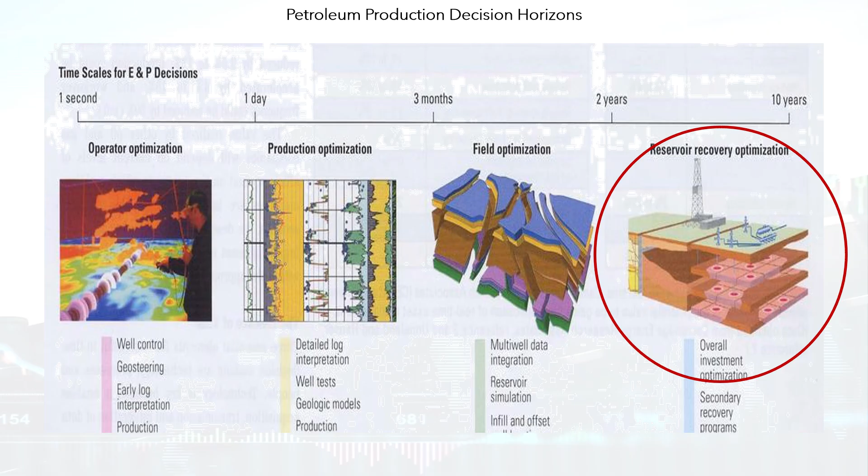The problem to be addressed in this lecture is related to reservoir recovery optimization. It includes overall investment optimization and secondary recovery programs, and concentrates on oil fracking and shale gas recovery.

Since the gas is trapped in shale sediments, its extraction is carried out using the hydraulic fracturing or fracking technique. This technique begins with the drilling of a vertical well that, once the desired depth has been reached, is accompanied by a horizontal drilling that can extend between 1 and 1.5 kilometers. This type of drilling is repeated in different directions, starting from the same initial vertical hole.

Once drilling is done, and due to the low permeability of shale rock, it is necessary to fracture the rock by injecting a mixture of water, sand and chemicals at high pressure, to allow the flow and exit of the gas. The flow decreases very quickly, so to maintain production it is necessary to continuously perform the hydraulic fracturing procedure in the same wellbore.

The most important socio-environmental impact of shale gas exploitation is concentrated in the decrease in the availability of water for humans and ecosystems. Between 9 and 29 million liters are required for the annual fracturing of a single well. The exploitation of 20,000 wells per year would mean an equivalent volume of water between 4.9 and 15.9 million people in a year.

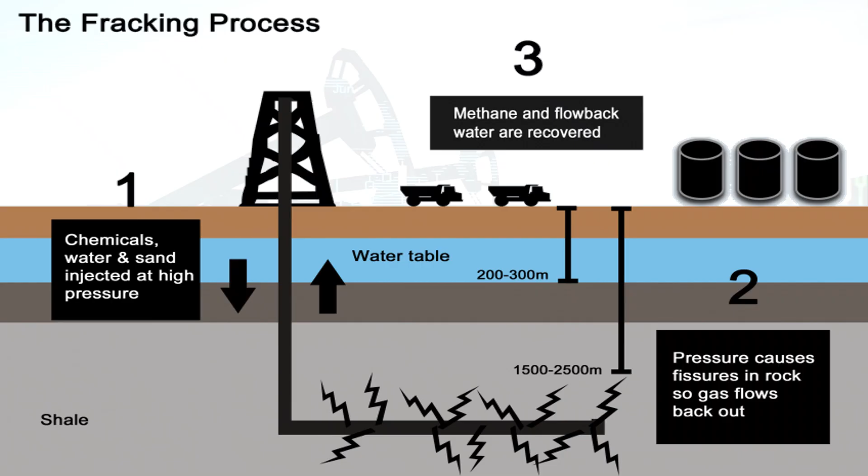What is the difference between conventional and unconventional gas? The terms conventional gas and unconventional are often misunderstood and have taken on different meanings in the gas industry. Conventional gas can be developed with a limited number of wells due to the accumulation of hydrocarbons in a confined area, with well-connected pore spaces within the bedrock, which allow effective drainage from strategically located wells.

The gas flows to the surface under its own pressure, driven by a water table under an expanding pressurized gas layer that covers the gas.

In contrast, with unconventional gas, the source rocks that contain the gas have much lower porosity, i.e., the void spaces between the grains that make up the rock are very small, and much lower permeability, i.e., the interconnection of pore spaces to allow gas to pass through the rock is very low. Therefore, artificial stimulation, such as hydraulic fracturing, must be employed to generate the gas flow.

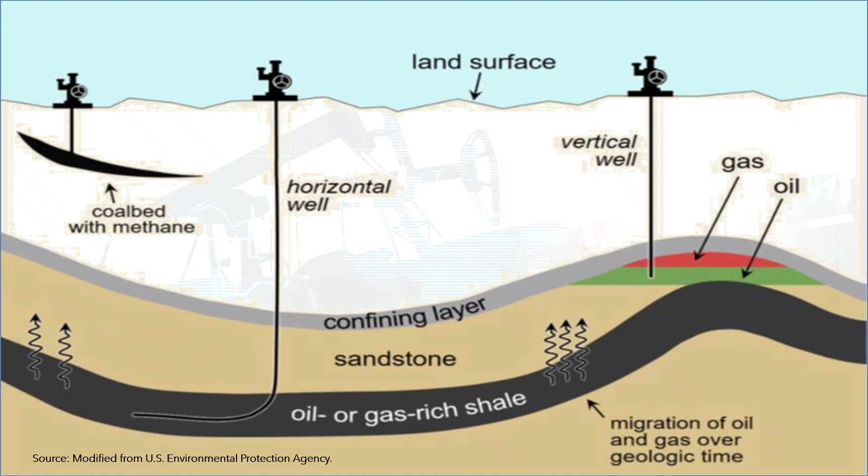Conventional gas production has been improved and many of these techniques have been refined and applied to unconventional gas. Horizontal drilling and hydraulic fracturing have been used for decades in conventional reservoirs, but increased efficiency and accuracy have allowed this technology to be employed in unconventional gas reservoirs, making them economically viable.

The low permeability of the rock means that the gas, whether adsorbed or free, in the pores of the rock, cannot flow easily. To extract shale gas, wells are drilled at depths of between 1,500 and 4,000 meters through several layers of rock to access the shale.

The wells are lined with steel and cement adapted to their purpose, designed to protect the groundwater from contamination. To maximize shale gas recovery, a technique called horizontal drilling is used. This technique usually involves the well changing from vertical to horizontal direction deep underground, away from any aquifer.

Showing how fracking for shale gas oil works.

First, the earth is drilled to reach the area where the shale gas or oil is located. The high-pressure mixture is then directed towards the rock to release the gas or oil, causing it to flow to the surface where it is extracted for energy purposes.

The figure shows a schematic of a typical fracking field. Small fissures are created that release the gas, which then flows up the pipe, digging into the ground and being stored on the surface in containers. The sand ensures that cracks, once opened, do not close, so that oil and gas can flow for a long time after fracturing. Once the fracturing is complete, the constructions are removed and the well is sealed.

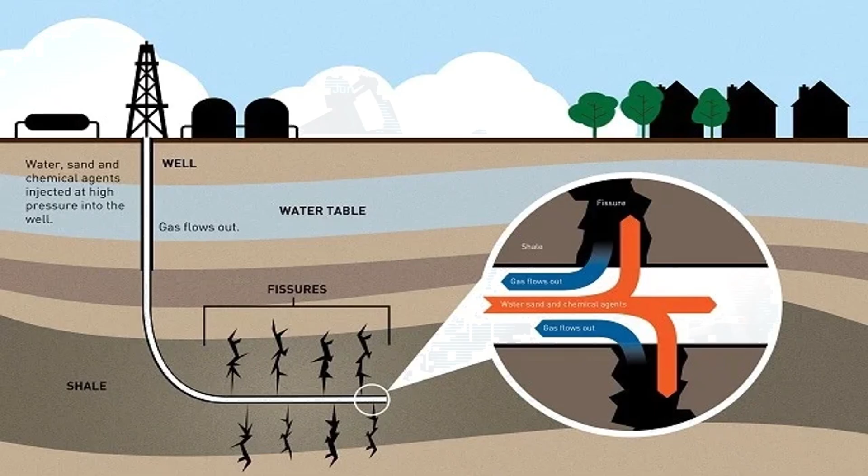Fracking fluids are typically pumped deep into the ground and stored there indefinitely. The shale fracking process is shown in the image: a hole is drilled into shale rock, water, sand and chemicals are pumped into the borehole, pressure in the bore causes fractures in the shale, and gas from the shale flows into the pipe and back to the surface.

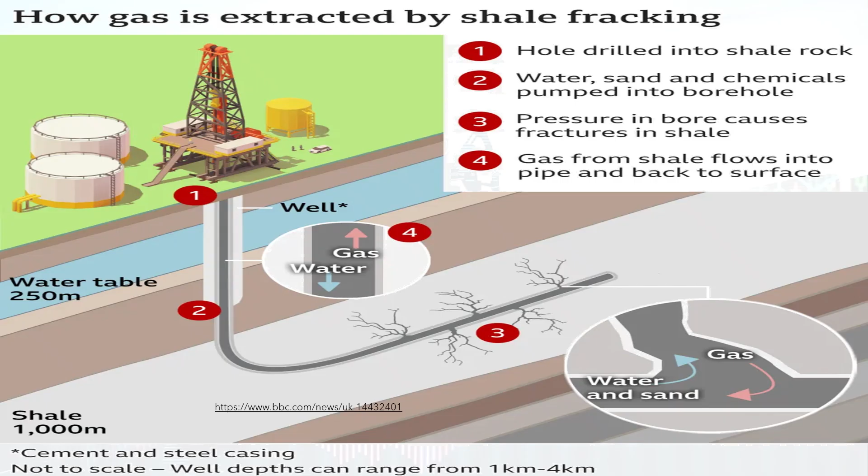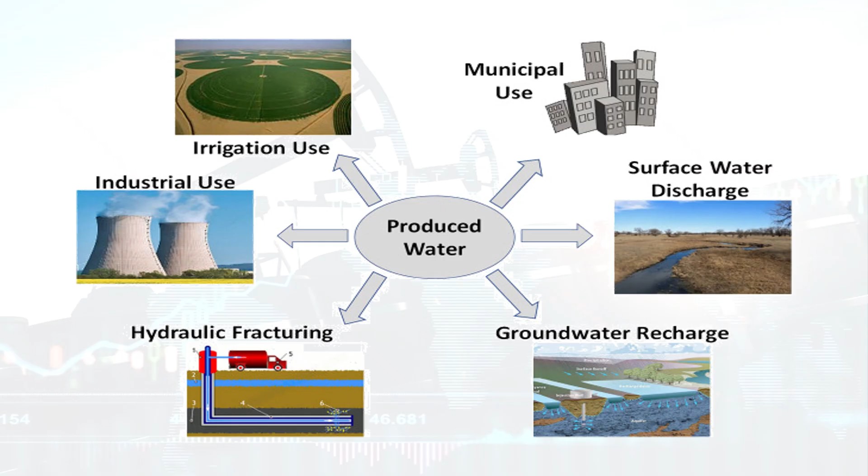Produced water can be used in irrigation, municipal, industry, surface water, groundwater, and hydraulic fracking. Competition between these uses must be considered in any fracking project.

Solution: this type of oil project is subject to the following constraints. Shale gas production: the number of wells previously drilled in a pad determines the shale gas production at every period, while methane, ethane and other NGLs produced at the well pads are directly obtained from the shale gas composition.

Flow balances: stream flows from well pads converge to junction nodes, where they are compressed and diverted to processing plants. Flow balances at junction nodes and separation plants are imposed.

Sizing plants, pipelines and compressors: separation plants construction and expansion, as well as the installation of new pipelines and compressors, are monitored over the planning horizon. This permits tracking of the shale gas processing capacity, the maximum flows in pipelines, and the compression power.

Water supplies: water sources for fracturing new wells are strategically allocated to well pads so as to comply with their limited water availability. Maximum demands: dry gas and NGLs have limited demands from nearby markets.

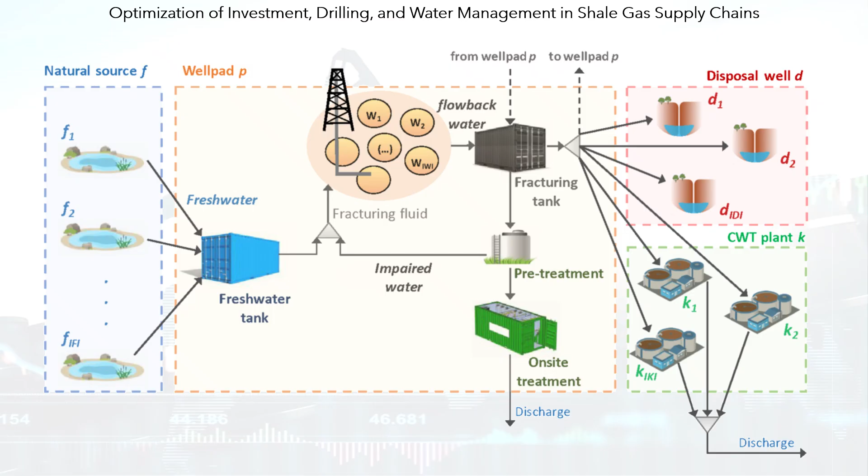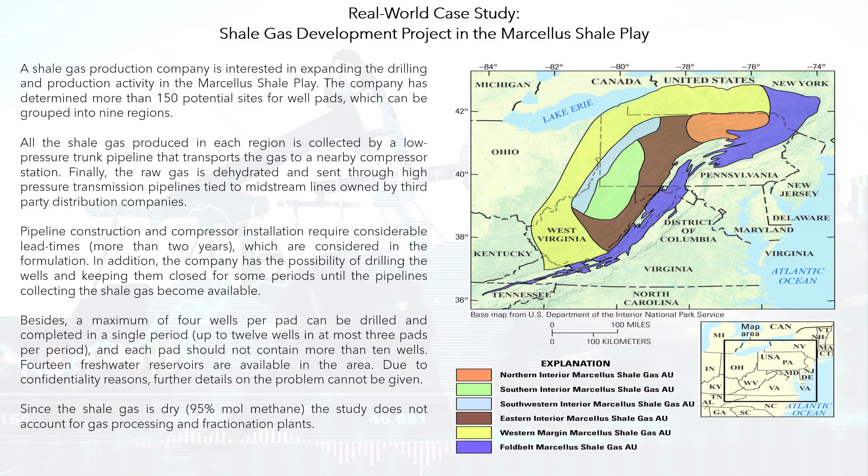Real-world case study: shale gas development project in the Marcellus Shale play. A shale gas production company is interested in expanding the drilling and production activity in the Marcellus Shale play. The company has determined more than 150 potential sites for well pads, which can be grouped into 9 regions.

All the shale gas produced in each region is collected by a low-pressure trunk pipeline that transports the gas to a nearby compressor station. Finally, the raw gas is dehydrated and sent through high-pressure transmission pipelines tied to midstream lines owned by third-party distribution companies.

Pipeline construction and compressor installation require considerable lead times, more than 2 years, which are considered in the formulation. In addition, the company has the possibility of drilling the wells and keeping them closed for some periods until the pipelines collecting the shale gas become available.

A maximum of 4 wells per pad can be drilled and completed in a single period, up to 12 wells in at most 3 pads per period, and each pad should not contain more than 10 wells. 14 freshwater reservoirs are available in the area.

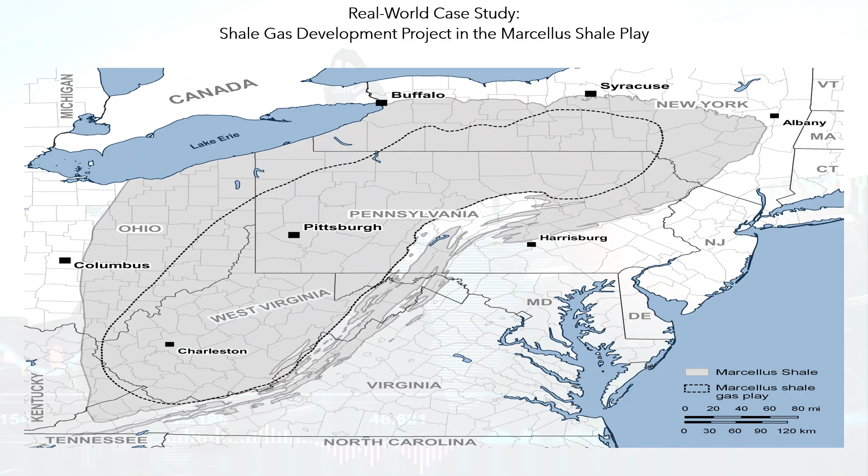Due to confidentiality reasons, further details on the problem cannot be given. Since the shale gas is dry, 95% mole methane, the study does not account for gas processing and fractionation plants.

The Marcellus, Point Pleasant and Utica are extensive formations that cover parts of Kentucky, Maryland, New York, Ohio, Pennsylvania, Virginia, and West Virginia. In 2011, the USGS estimated a mean of 84 trillion cubic feet of natural gas in the Marcellus Shale, and in 2012 the USGS estimated about 38 trillion cubic feet of natural gas in the Utica Shale. This is a significant increase from the previous USGS assessments of both formations.

The Marcellus Shale contains an estimated 1.5 billion barrels of natural gas liquids, while the Point Pleasant Utica Shale contains an estimated 1.8 billion barrels of oil and 985 million barrels of natural gas liquids. Natural gas liquids are liquid hydrocarbons like propane, butane or ethane.

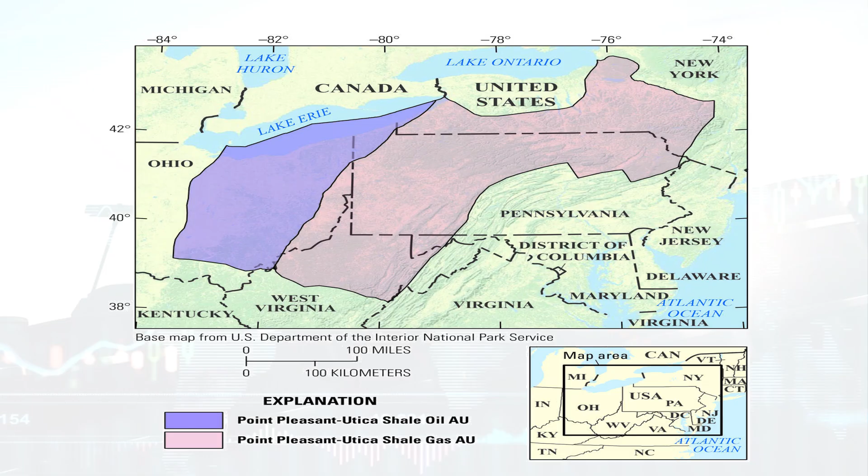Most of the drilling activity at Utica is located east of the Great Lakes, but shale was first discovered in Quebec. Forest Oil officially announced the discovery in April 2008, with 2 vertical wells producing 1 MMscfd at depths of 4,800 feet.

Talisman Energy began operations in Quebec Utica the following year, but overall activity was limited. The province of Quebec all but put an end to new drilling opportunities when it issued a moratorium on hydraulic fracturing in March 2012. Currently, New York and Maryland have similar restrictions.

During exploratory phases in Quebec, Chesapeake Energy claimed a discovery in Utica, Ohio, in September 2011. Its 4 completed wells had an average depth of 5,280 feet, and 3 wells in the liquid-rich part had average yields of 2,051 barrels of oil equivalent per day. The other well in the dry gas window peaked at 6.4 mmcf/d.

Chesapeake Energy management was world-class and acquired approximately 619,000 gross acres, increasing activity through joint ventures while remaining the primary operator. Permits accelerated rapidly, as the Ohio Department of Natural Resources approved more than 1,000 permits between 2010 and 2013. A state report also credited shale with increasing employment in the oil and gas sector by 30%, while offering wages 68% higher than the state median.

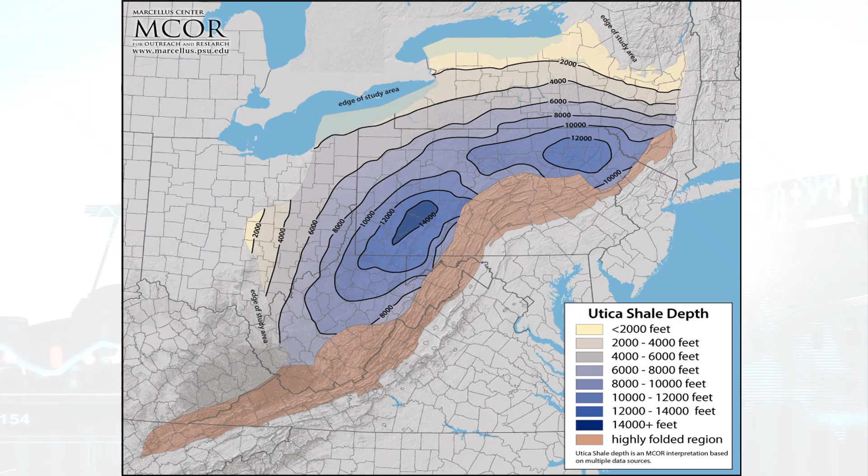Today, drilling productivity shows that Utica's gas production is 67% higher than that of the Bakken, and that its oil production exceeds that of Marcellus. Total gas production has grown at a compound monthly rate of 6% since January 2012.

In March 2015, Seneca Resources announced a test well in Tioga County, PA returned an IP rate of 22.7 mmcf/d. The only catch was that the well was drilled to 12,200 feet and received 30 fracking stages, which may indicate how truly difficult it is to penetrate the rock.

The results still present a measure of success, considering the Utica was initially believed to be predominantly in Ohio. Instead, it reaches all the way to northern Pennsylvania and is presumably economical in New York.

The Utica's viability in Tioga County was confirmed by Royal Dutch Shell late in September 2014, with 2 test wells returning initial production rates of 11.2 and 26.5 mmcf/d, respectively. Shell increased its acreage in the region by more than 50% before announcing the results of the test wells.

The optimal solution yields an NPV in American dollars, with a global optimality gap of 8.2%. The most convenient regions to be exploited during the following 10 years are 2 regions, where a total of 22 and 18 pads are constructed, respectively.

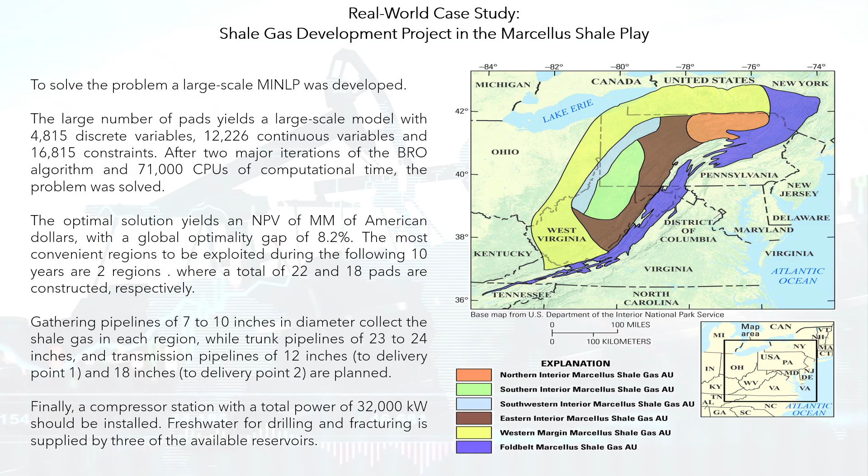Gathering pipelines of 7 to 10 inches in diameter collect the shale gas in each region, while trunk pipelines of 23 to 24 inches, and transmission pipelines of 12 inches to delivery point 1, and 18 inches to delivery point 2, are planned. Finally, a compressor station with a total power of 32,000 kilowatts should be installed. Freshwater for drilling and fracturing is supplied by 3 of the available reservoirs.

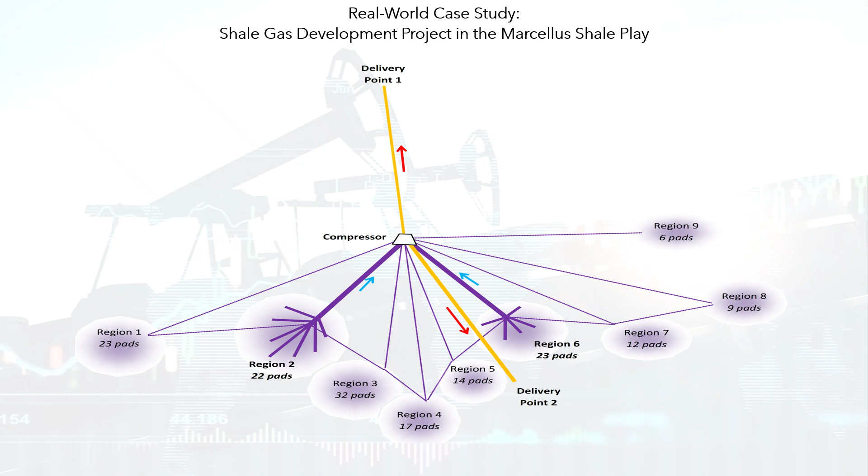Gathering pipelines of 7 to 10 inches in diameter collect the shale gas in each region, while trunk pipelines of 23 to 24 inches, and transmission pipelines of 12 inches to delivery point 1, and 18 inches to delivery point 2. A compressor station with a total power of 32,000 kilowatts should be installed. Freshwater for drilling and fracturing is supplied by 3 of the available reservoirs.

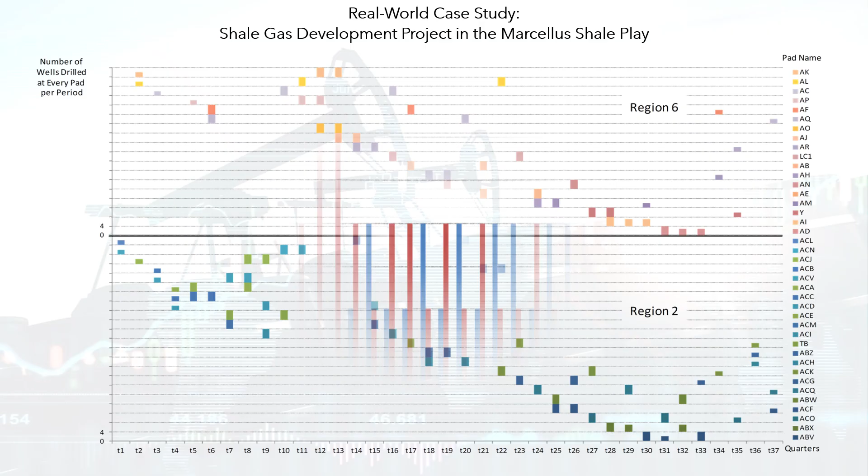The figure shows the number of wells drilled at every pad per period in the Marcellus Shale play. The figure shows the total number of wells drilled at every region. The figure shows the drilling strategy in the Marcellus Shale play.

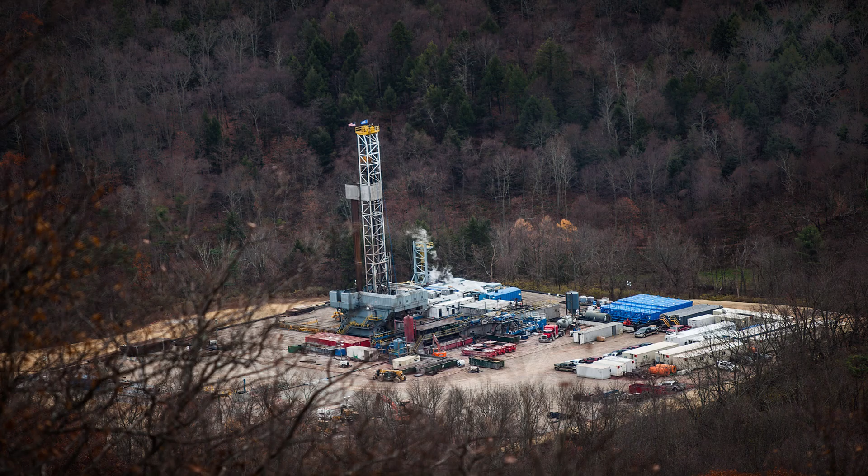Residents fear fracking for gas will cause permanent damage to their forests, state parks and agricultural fields, as well as their water and air. Design of fracking oil and shale gas production networks.

A case study is solved to evaluate the effectiveness of the proposed optimization approach. The figure shows the location of the potential shale gas reserves, according to studies by USGS.

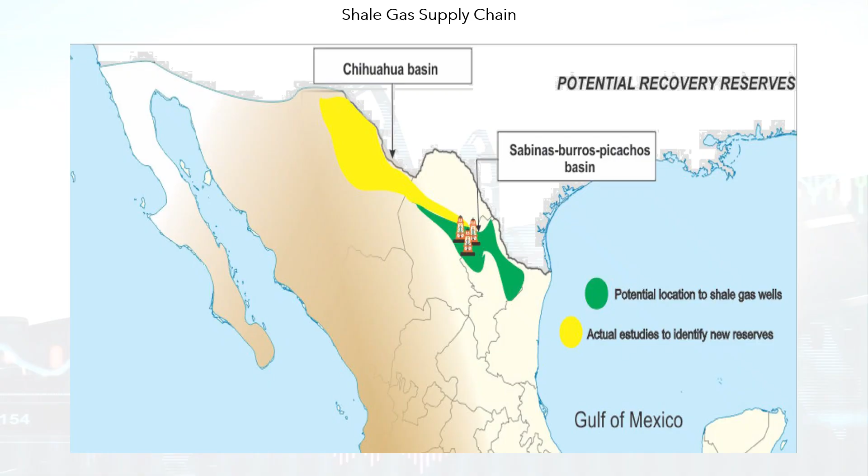The production system configuration shown in the figure requires 2 storage pits, with capacities of 2,100 and 4,950 cubic meters, to prevent the produced water from leaving the well platforms.

The treatment system is composed of 2 forward osmosis units, and a mechanical vapor compression plant, while the second storage system requires 3 units with capacities of 670, 4,950 and 700 cubic meters respectively, and the final disposal is an additional treatment.

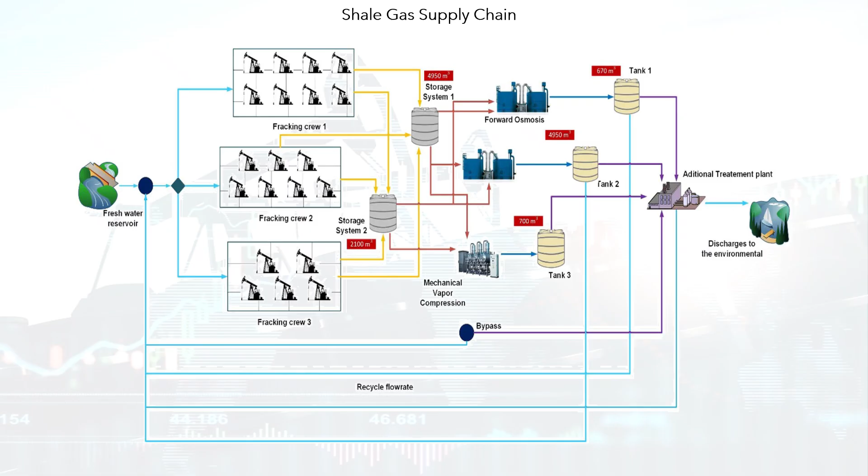IMTAL represents an indirect measure of the pollutants removed by treatment technologies. When this objective is increased, the environmental impact decreases, but TAC increases due to the selection of more effective and more expensive treatment units. On the other hand, when TAC is reduced, IMTAL's value worsens, causing a greater environmental impact.

It should be noted that freshwater consumption is a key criterion, which plays an important role in the selection of the final design associated with each solution belonging to the Pareto curve.

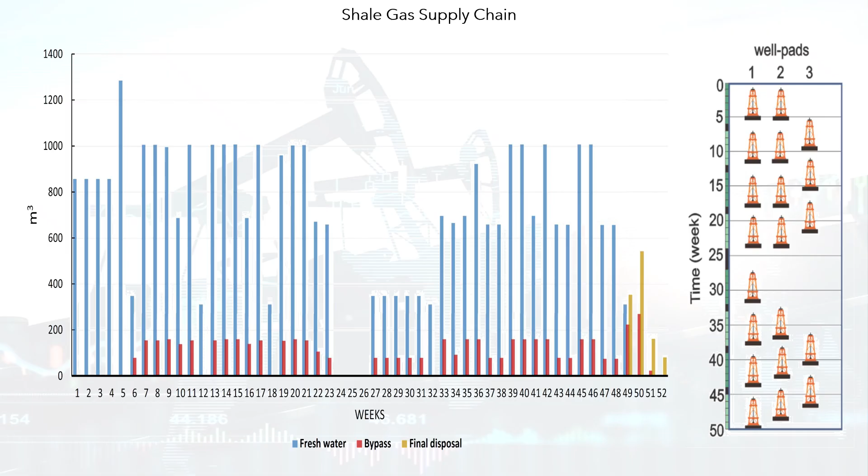The composition of the shale gas supply chain is the result of an optimization process. The figure exhibits the optimal distribution for the water streams to properly operate in point A. It should be noted that freshwater is the main source to carry out the completion.

The following section presents several papers in which Professor Ignacio Grossmann and his team have participated at Carnegie Mellon University.

Optimization models of optimal investment, drilling, and water management in shale gas supply chains. The paper provides an overview of 2014 optimization models for shale gas production. It first describes a mixed integer optimization model for the design of shale gas infrastructures, aimed at optimizing the number of wells to drill, size and location of new gas processing plants, section and length of pipelines for gathering raw gas, delivering dry gas and natural gas liquids, power of gas compressors, and planning of freshwater consumption for well drilling and fracturing.

Optimization models for water management in chemical processes and shale gas production. This thesis was submitted in partial fulfillment of the requirements for the degree of Doctor of Philosophy at Carnegie Mellon University. It is part of the previous paper.

Strategic planning, design and development of the shale gas supply chain network. The long-term planning of the shale gas supply chain is a relevant problem. The paper presents a mixed integer nonlinear programming (MINLP) model to optimally determine the number of wells to drill at every location, the size of gas processing plants, the section and length of pipelines for gathering raw gas and delivering processed gas and byproducts, the power of gas compressors, and the amount of fresh water required from reservoirs for drilling and hydraulic fracturing, to maximize the economics of the project.

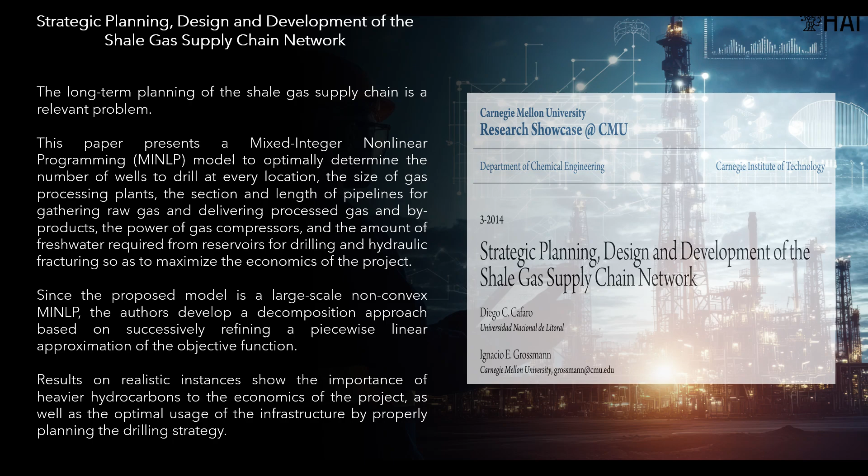Mathematical programming models for shale oil and gas development: a review and perspective. The paper provides a comprehensive review of mathematical programming models for shale oil and gas development, and distinguishes contributions in five major topic areas, namely: development planning, water management, production optimization, supplies, gathering and processing, and life cycle analysis and sustainability.

Environmental and economic water management in shale gas extraction. The paper presents a study of the life cycle impact assessment (LCIA) of water management in shale gas exploitation. The study includes the most common pretreatment technologies and three different desalination technologies of recent interest: single and multiple effect evaporation with mechanical vapor recompression, and membrane distillation. Results show that multiple effect evaporation with mechanical vapor recompression is the most suitable technology. A mixed integer linear programming bi-criterion optimization water management model addresses profit maximization and LCIA minimization.

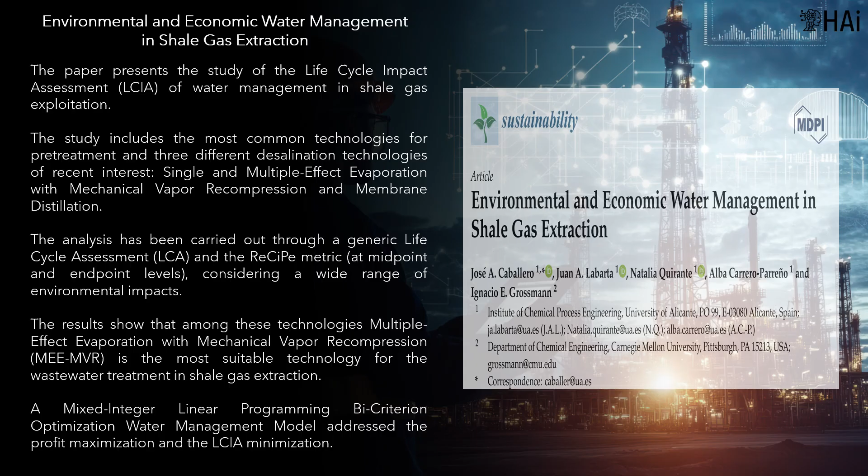Optimization models for shale gas water management. There are four key aspects for water use in hydraulic fracturing, including source water acquisition, wastewater production, reuse and recycle, and subsequent transportation, storage, and disposal. This work optimizes the water use life cycle for well pads through a discrete time two-stage stochastic mixed integer linear programming model under uncertain availability of water.

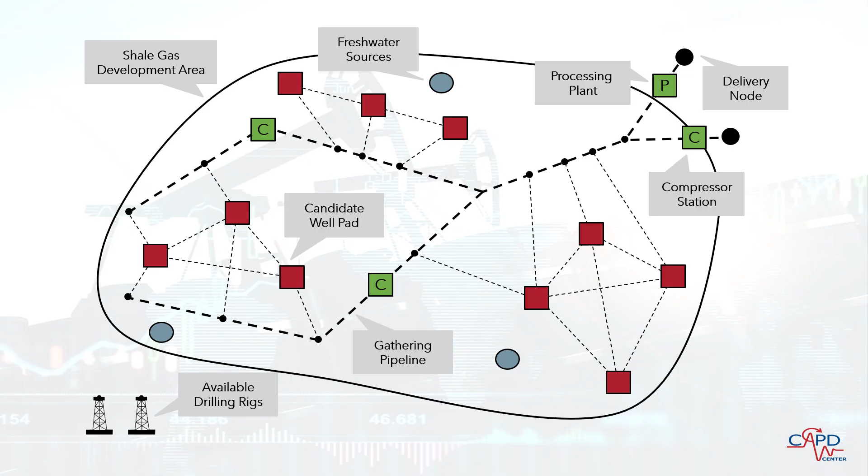The proposed models consider a long time horizon and multiple scenarios from historical data. Two examples of the Marcellus Shale play are presented to illustrate the effectiveness of the formulation and to identify optimization opportunities that can improve both the environmental impact and economical use of water. The main objective is to design the topology of the shale gas recovery network, establish the operating conditions of the network for the duration of its operation, and guarantee the quality of the environment.

Considering that the shale gas development problem is an integer mixed nonlinear programming (MINLP) problem, the proposed algorithm is based on 3 phases. Composition bound pre-analysis identifies bounds for molar fractions based on given gas compositions to obtain good limits. The single delivery node problem solves for a single delivery node MILP problem, to ensure feasibility and a good starting point for the next phase. The multiple delivery node problem solves the nonlinear problem with an existing MINLP solver, such as the outer-approximation method, until the optimal solution is reached.

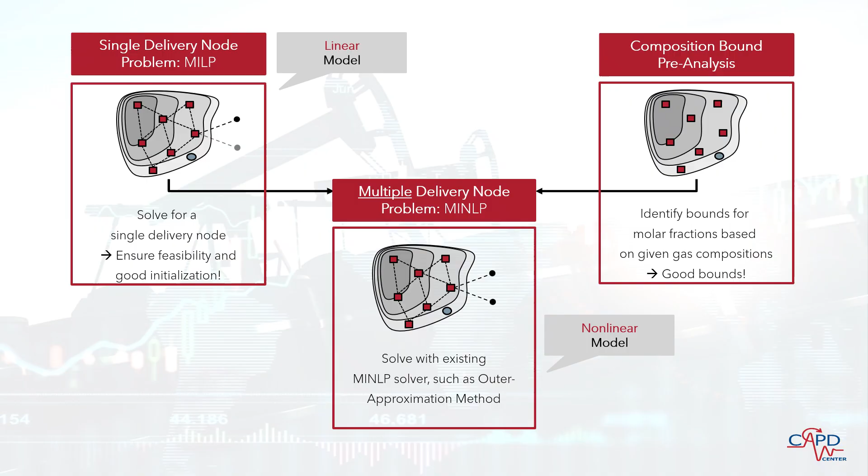The shale gas development problem involves many discrete planning and design decisions that need to be addressed simultaneously, such as the optimal drilling strategy for the multiple delivery node problem. The optimal development schedule is characterized by many return-to-pad operations that maximize overall equipment utilization. The optimization reveals that the optimal strategy could significantly improve the profitability of the gathering system.

The image presents an example of the work carried out by the Center for Advanced Process Decision Making (CAPD) at Carnegie Mellon University, for Carrizo Company, which operates in the Marcellus Shale play. The case is made up of 14 well pads, 540 time periods, 2 impoundments, and 1 frac crew.

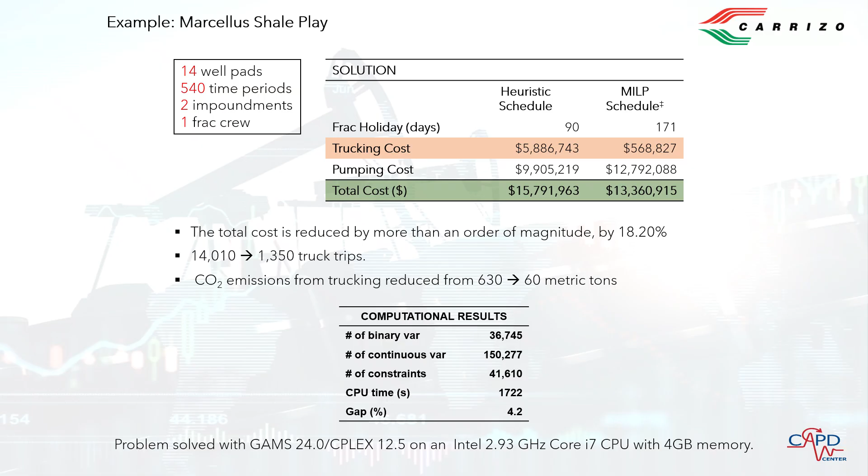Benefits of mathematical modeling compared to a heuristic solution without exact mathematical models: the total cost is reduced by more than an order of magnitude, by 18.20%. The number of truck trips is reduced from 14,010 to 1,350 trips, and CO2 emissions from trucking reduced from 630 to 60 metric tons. In 2015, the problem was solved with GAMS 24.0 and CPLEX 12.5, on an Intel 2.93 GHz Core i7 CPU with 4 GB memory, in 1722 seconds of CPU time.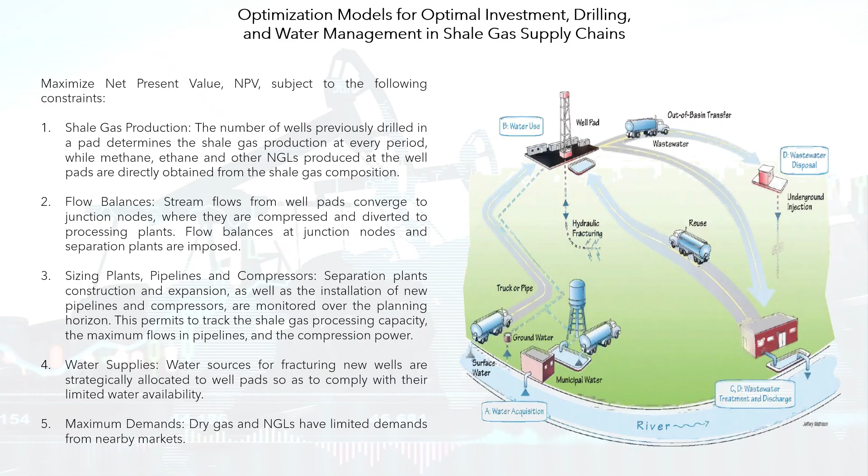Shale gas production: the number of wells previously drilled in a pad determines the shale gas production at every period, while methane, ethane, and other NGLs produced at the well pads are directly obtained from the shale gas composition.

Flow balances: stream flows from well pads converge to junction nodes, where they are compressed and diverted to processing plants. Flow balances at junction nodes and separation plants are imposed.

Sizing plants, pipelines and compressors: separation plant construction and expansion, as well as the installation of new pipelines and compressors, are monitored over the planning horizon. This permits tracking of the shale gas processing capacity, the maximum flows in pipelines, and the compression power.

Water supplies: water sources for fracturing new wells are strategically allocated to well pads so as to comply with their limited water availability. Maximum demands: dry gas and NGLs have limited demands from nearby markets.

The third water source, crude oil drain, has a maximum flow rate of 15 tons/h, and the wastewater treatment plant can accept a maximum of 360 tons/h of wastewater.

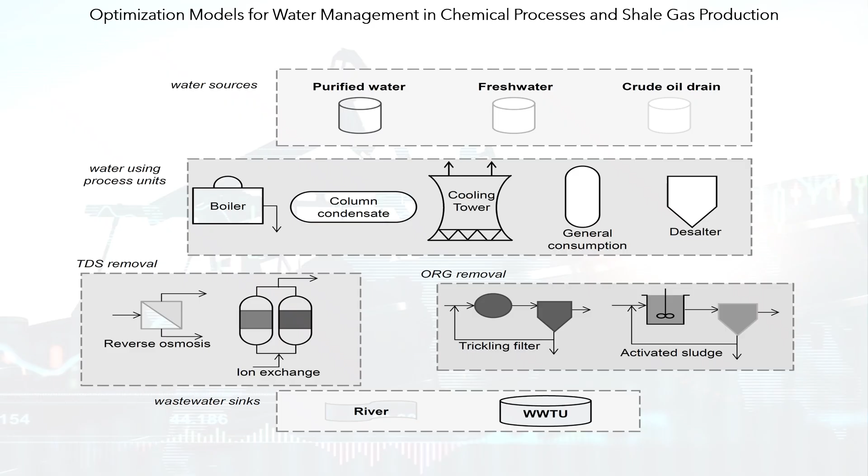The objective of the model is to determine the fracturing schedule that minimizes costs for freshwater consumption, transportation, treatment, storage, and disposal.

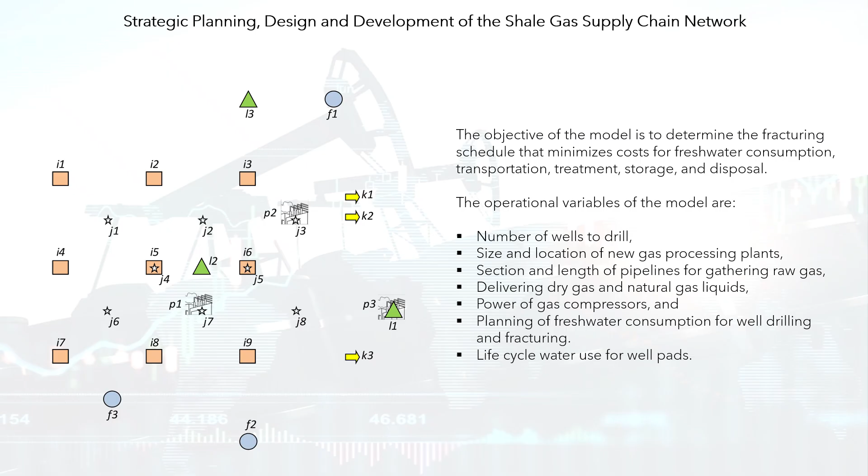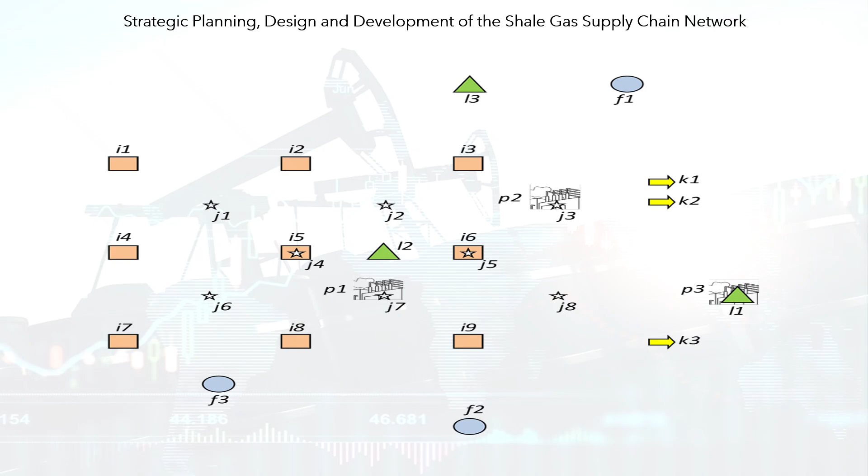The shale gas supply chain superstructure comprises 9 potential sites for drilling wells, I1 to I9; 8 potential sites for junction compression nodes, J1 to J8; 3 possible sites for processing plant installation, P1 to P3; 3 methane demanding nodes, K1 to K3; 3 ethane demanding nodes, L1 to L3; and 3 freshwater sources, F1 to F3.

The operational variables of the model are the number of wells to drill, the size and location of new gas processing plants, the section and length of pipelines for gathering raw gas and delivering dry gas and natural gas liquids, the power of gas compressors, and the planning of freshwater consumption for well drilling and fracturing.

Life cycle water use for well pads. The Cartesian coordinates of each site, in km, are given in Table 1. Distances between nodes for pipeline length and water transportation calculations are measured in Euclidean norm.

The planning horizon comprises 40 quarters, and the annual rate considered for discounting back cash flows is 13.5%. The methane price is assumed to be seasonal.

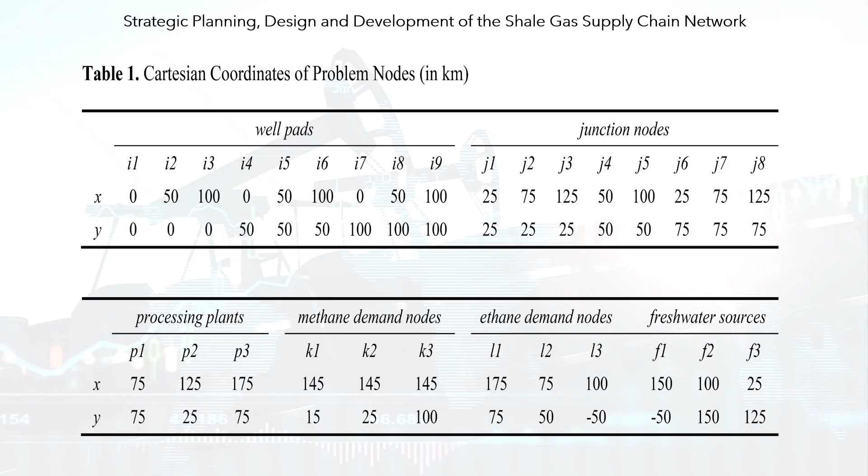No more than 3 wells can be drilled in a single location during 1 quarter, and a total of 20 wells is the maximum number permitted for a single well pad. Overall, a total of 180 wells can be drilled over the time horizon.

Below is the notation used in the strategic planning, design and development of the shale gas supply chain network model.

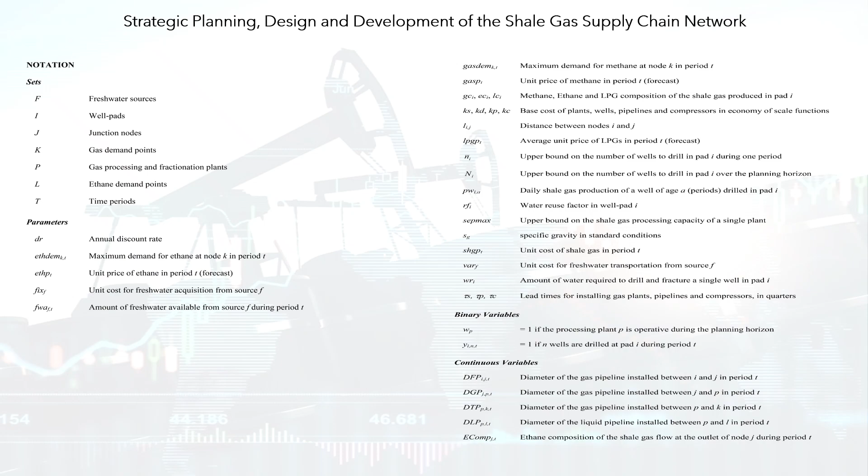Subsequently, the model used is presented in a summarized way. The feasible region of the model is determined by a set of linear constraints, grouped into 5 blocks: shale gas production, flow balances, plants, pipelines and compressors sizing, water supplies, and maximum demands.

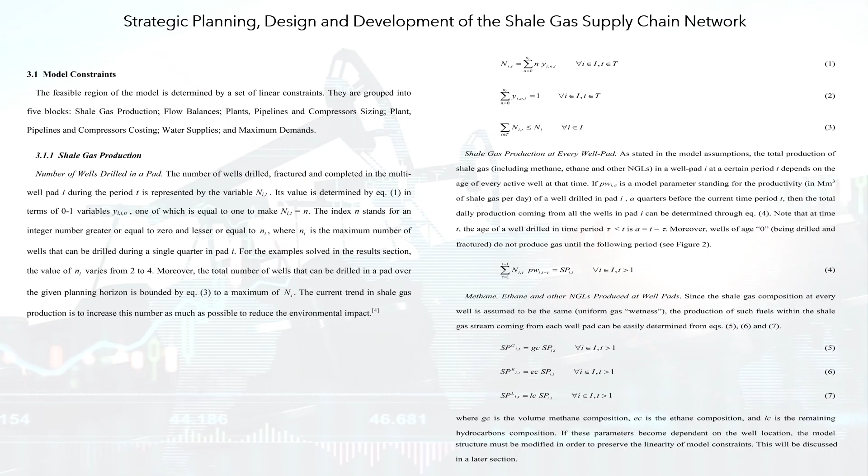The number of wells drilled, fractured and completed in the multi-well pad I during period T is represented by the variable NIT. Shale gas production at a certain pad, during a period, is sent to one or more junction nodes, depending on the network design, with streams flowing from a well pad to junction nodes.

The total processing capacity of a plant P at time T is given in M3 of shale gas per day, and can be calculated from its capacity at the previous period, T-1, plus the capacity expansion started at the beginning of period T-tau s. In other words, it is assumed that separation plants, installations and expansions, take tau s periods.

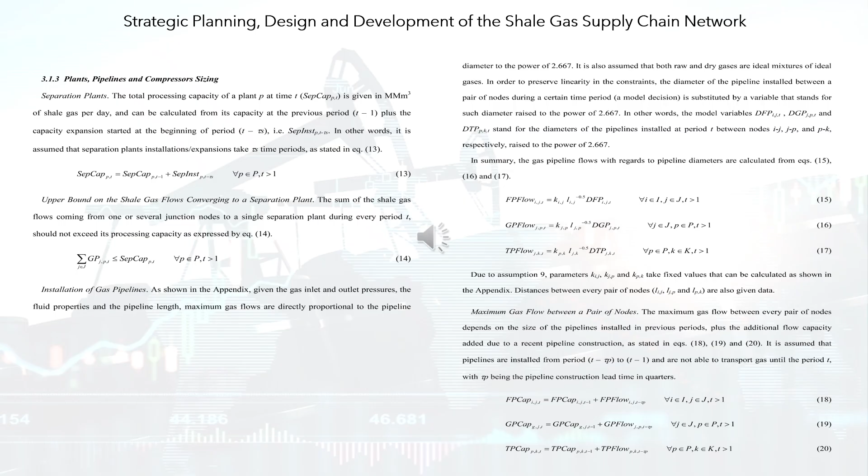The set of equations considered by the model are: upper bound on the shale gas flows converging to a separation plant, installation of gas pipelines, maximum gas flow between a pair of nodes, installation of liquid pipelines, and maximum flow in liquid pipelines.

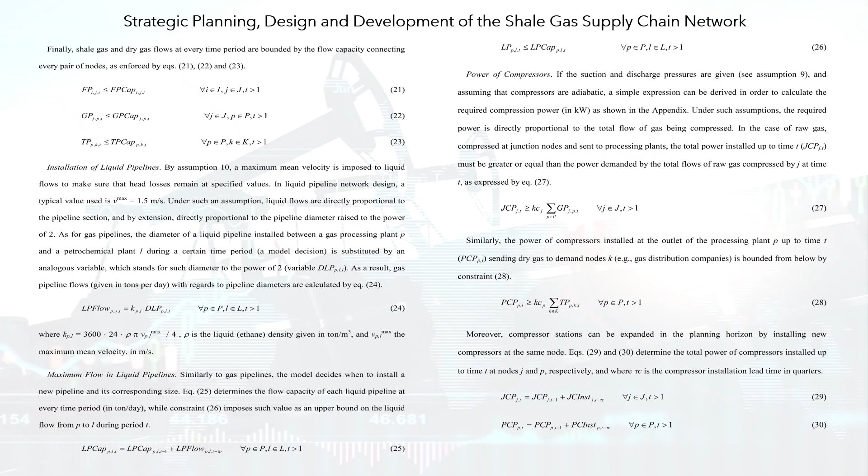A large amount of freshwater is required in the shale gas industry for the hydraulic fracturing of new wells. The model assumes that the total amount of water required by a single well during the drilling, fracturing, and completion processes is known but may depend on the well location.

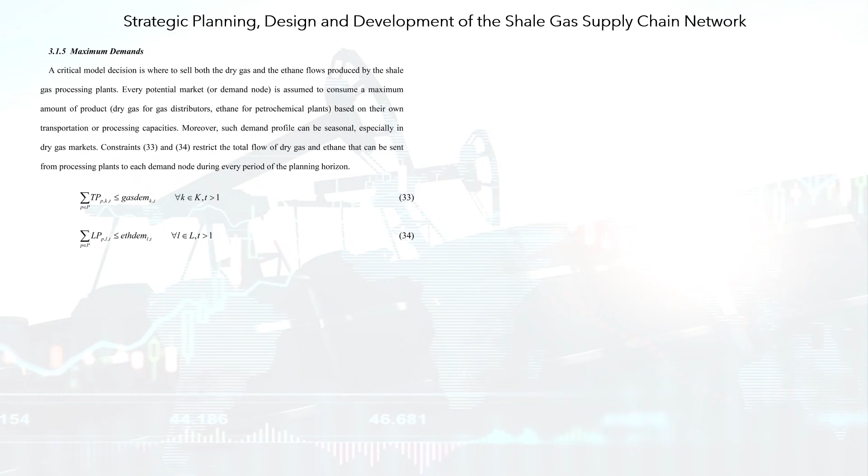A critical model decision is where to sell the dry gas and the ethane flows produced by the shale gas processing plants. Every potential market, or demand node, is assumed to consume a maximum amount of product — dry gas for gas distributors, ethane for petrochemical plants — based on their own transportation or processing capacities.

The objective function of the model is to maximize the net present value of the long-term planning.

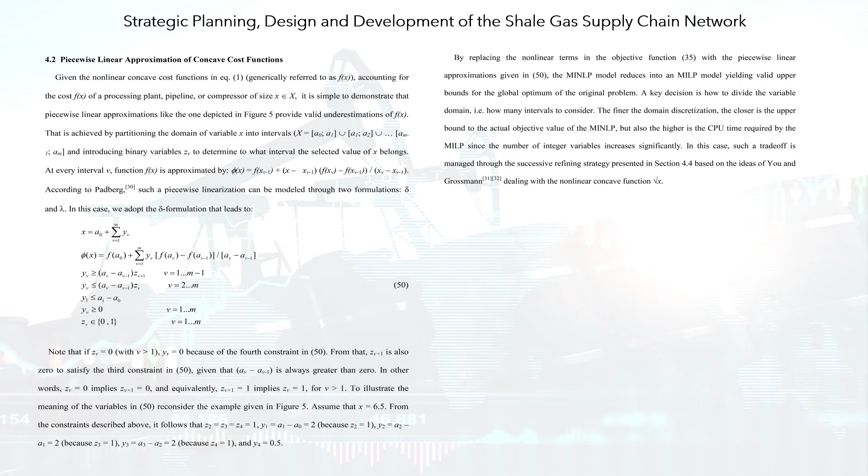Piecewise linear approximation of concave cost functions: given the nonlinear concave cost, accounting for the cost of a processing plant, pipeline, or compressor, it is simple to demonstrate that piecewise linear approximations provide valid underestimations.

By replacing the nonlinear terms in the objective function with the piecewise linear approximations, the model reduces into a MILP model yielding valid upper bounds for the global optimum of the original problem.

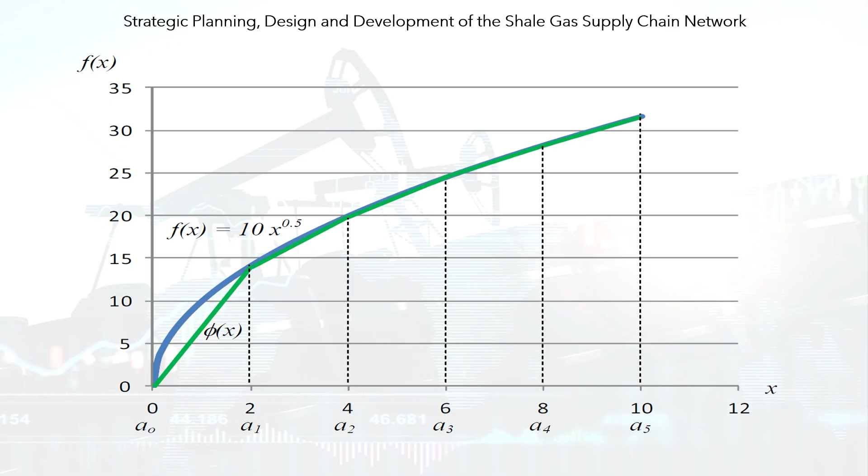A key decision is how to divide the variable domain, that is, how many intervals to consider. The finer the domain discretization, the closer is the upper bound to the actual objective value of the MILP, but also the higher is the CPU time required, since the number of integer variables increases significantly.

Freshwater consumption, mainly for hydraulic fracturing, is considered a fixed amount required during the drilling period, which depends on the location of the well pad and the possibility of reusing the return water. The selection of optimal sources for water supply is the key decision of the model.

Other operational matters such as the capture, treatment and final disposal of return water, as well as the planning of confinements and the stimulation of wells, are also part of the decisions, but are outside the scope of this work.

The well productivity, measured in thousands of cubic meters per day, is represented by a piecewise constant function of the well age, given in quarters, and the drill location.

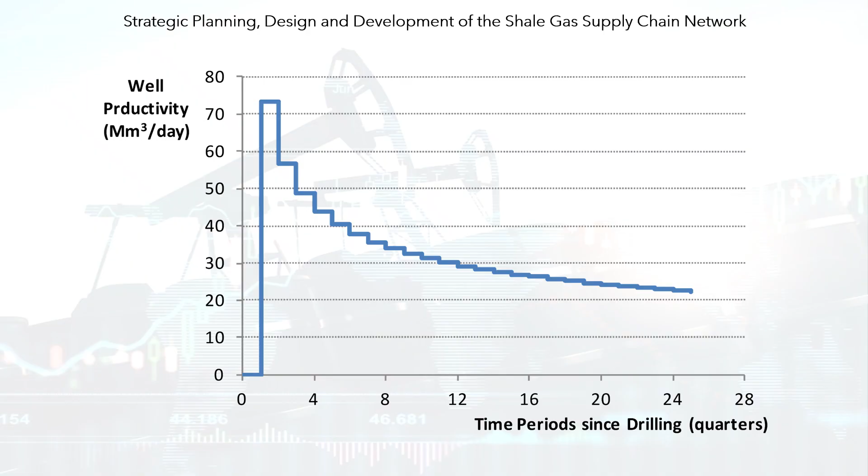Moreover, the shale gas composition, and particularly its wetness, percent of hydrocarbons other than methane, are assumed to be known and independent of the well site and its age. Shale gas productivity, in thousands of cubic meters per day, in each well is modeled as a decreasing function of the age of the well.

Two cases are considered. Example 1, in which shale gas water, its content and composition, are the same for all wells, and Example 2, in which the chemical composition of the gas depends on the location of the well.

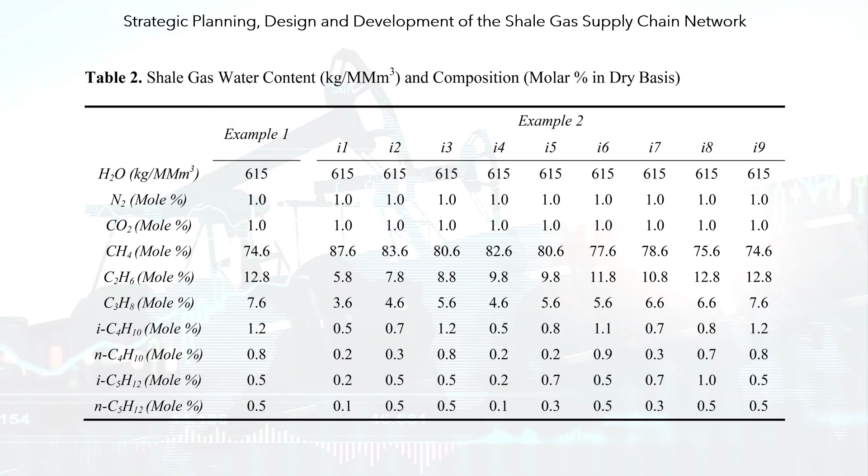$651.2. Due to the economies of scale, the plant and all the pipelines are installed in the first period of the time horizon with no expansions planned over the first 10 years.

Regarding shale gas compression power at junction nodes, 1,236 kilowatts, 706 kilowatts and 818 kilowatts are installed at nodes J4, J5, and J6, in that order.

The selected destinations for methane and ethane are nodes K3 and L2, respectively. Methane is supplied by a gas pipeline of 74.33 kilometers length, and 17.5 inches in diameter, requiring a compressor of 2,428 kilowatts.

Ethane is transported through a liquid pipeline of 5¾ inches in diameter. The maximum flow for both pipelines is reached in quarter T7, when the plant is operated at full capacity. The production level at the plant remains high for another 6 quarters, until the maximum number of wells at every pad, 20, is reached.

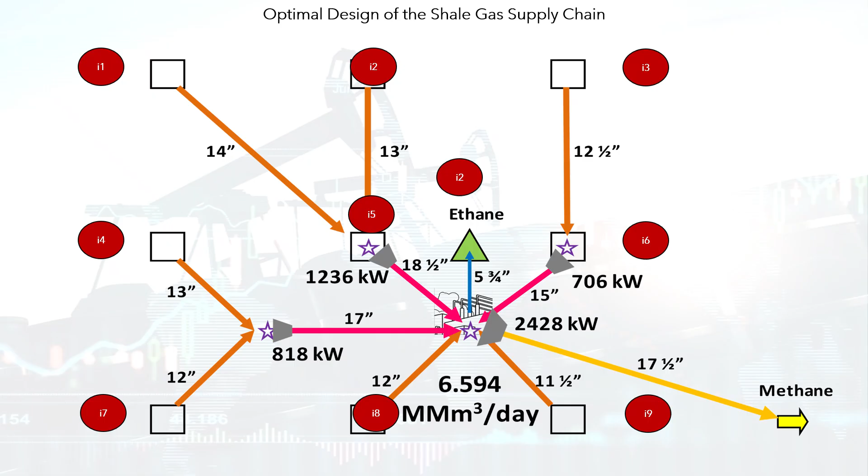The second step is to determine the detailed HEN and WN structures, and corresponding capital and utility costs using the fixed heat capacity flow rate, inlet and outlet temperatures, and water using process unit flow rates.

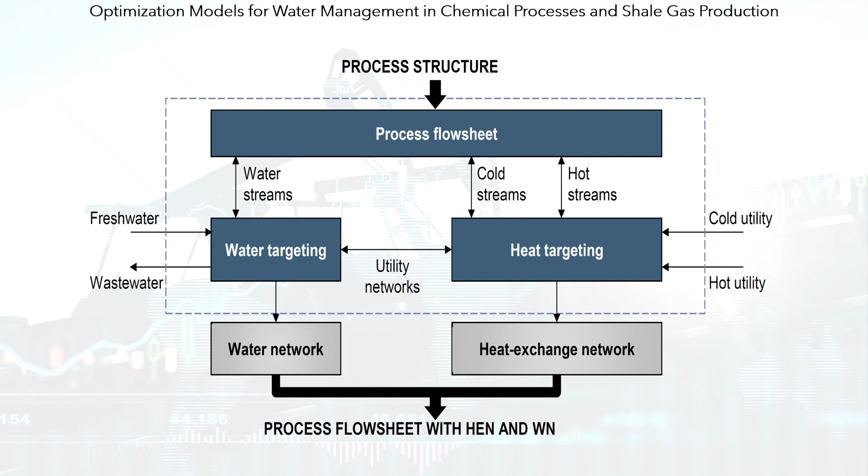The horizontal portion of the well is fractured in several stages, which require a fixed volume of water, which is obtained from freshwater sources and stored in freshwater reservoirs. Sand, 8.96%, and chemical additives, 0.44%, are then added to the water to form the fracturing fluid.

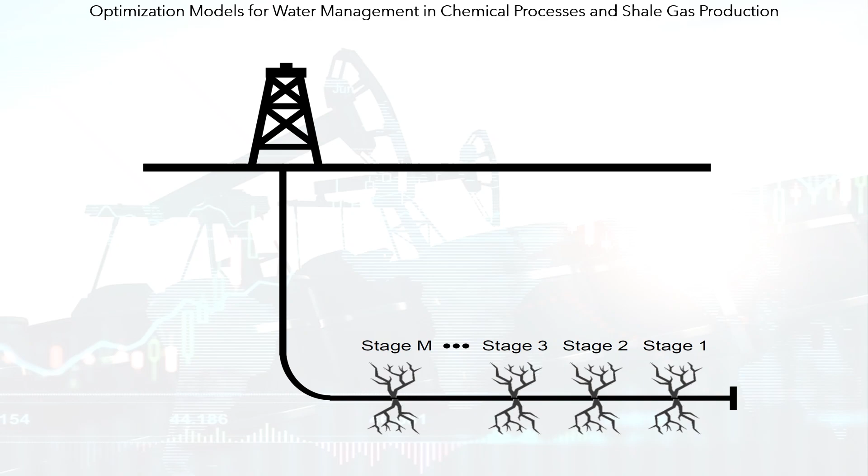Stage 1, located near the end of the well, is stimulated first, and the stage is temporarily capped to prevent its return, and Stage 2 follows Stage 1, and the process is repeated along the entire horizontal part of the well, until the last stage is completed.

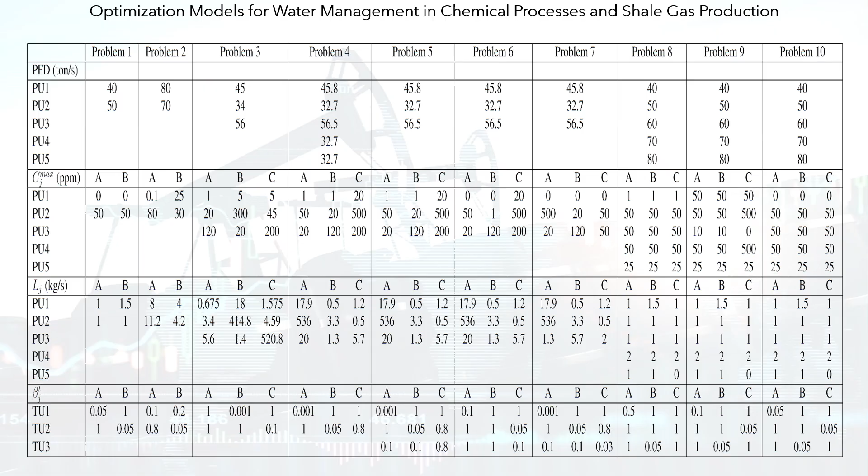In terms of the State Task Network, STN, the treatment facilities represent additional tasks, while the treated wastewater corresponds to additional states. The major assumptions for problem 2 are as follows.

Freshwater trucking cost is only volume dependent. Wastewater trucking cost is volume and distance dependent to allow for recycling among geographically proximate well pads. The wells on each well pad are aggregated. Arps decline curve is used to estimate gas production profile. A fixed percentage of total water used in fracturing must be freshwater.

Only the first 2 weeks of flowback water can be treated and recycled, and there are existing temporary wastewater piping connections between a selected set of well pads and treatment facilities.

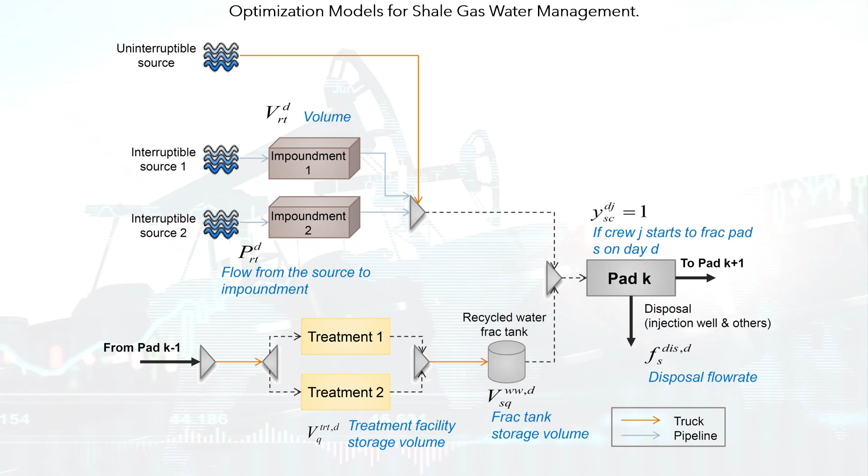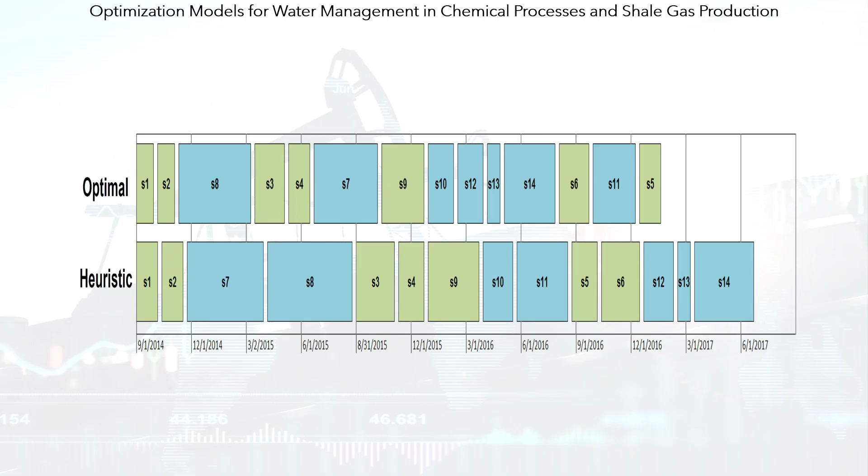The heuristic program generates the least benefit over the 3-year period. In the optimal solution, all well pads are stimulated with the fastest completion rate.

In the model, it is assumed that the desalination facility could be shared by other operators, who have around 200 wells to be completed during the same period.

Considering that desalination is not a common practice in Utica, it is interesting to note that the cost of scenario 2, without desalination, is 52% higher than the optimum.

Scenario 4 assumes that the rate of return doubles compared to the rate of return in the optimal case. The total water-related cost increases by 21%, which is expected as the cost of wastewater management increases significantly.

However, the cost of pumping in Scenario 4 is lower compared to the optimal case, between $38.9 and $41.8 million American dollars, as Scenario 4 takes advantage of recycling from the high rate of return.

3 technologies are analyzed in each case: SEE-MVR, single effect evaporation with mechanical vapor recompression; MEE-MVR, multiple effect evaporation with mechanical vapor recompression; and MD, membrane distillation.

The total LCIA associated with the wastewater process reaches approximately 73.2 points per cubic meter of treated water using MD technology, and this impact reaches approximately 6.0 points per cubic meter treated with MEE-MVR, which is around 91.8% lower.

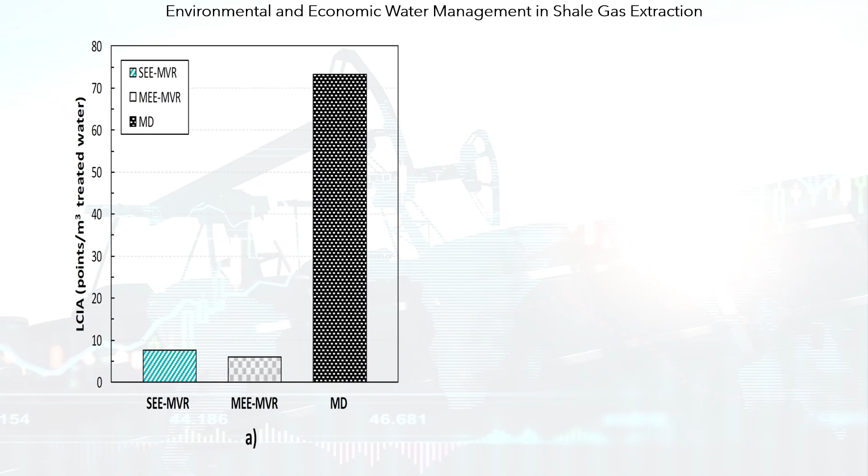This result is due to the use of steam needed as the driving force in MD. MD has the highest environmental impact in all categories: ecosystem quality, human health, and resources.

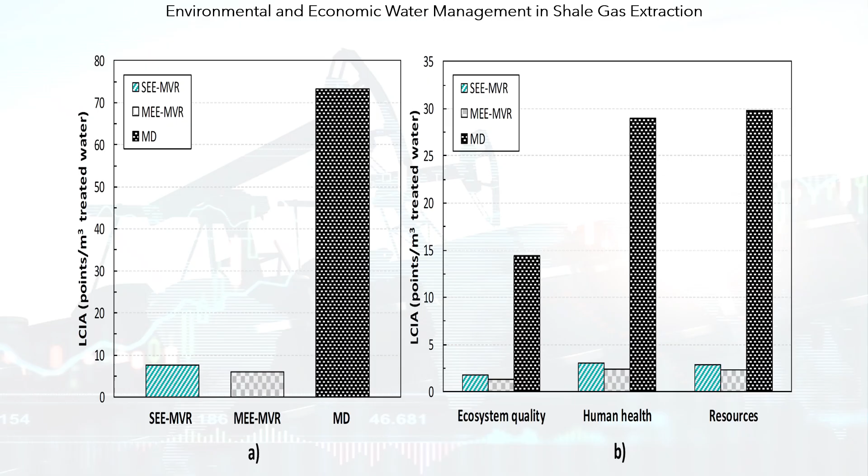From the environmental point of view, MEE-MVR is the best alternative for wastewater treatment in shale gas extraction, because it consumes less electricity than the SEE-MVR configuration, with a total environmental impact of 21.9% lower.

The figure shows the comparison of the environmental impact subcategories. The problem is multi-criteria, since maximizing benefits implies maximizing the negative environmental impact.

The figure shows the Pareto curve for the minimization of the Global Life Cycle Impact Assessment, LCIA, environmental impact, and maximization of the gross profit.

4 points are considered in the graph. A is the maximum profit. B is the minimum global environmental impact. C is a point in which the profit decreases only 1.06% while the environmental impact decreases 13.5%, and D is the optimal solution when the model minimizes freshwater consumption.

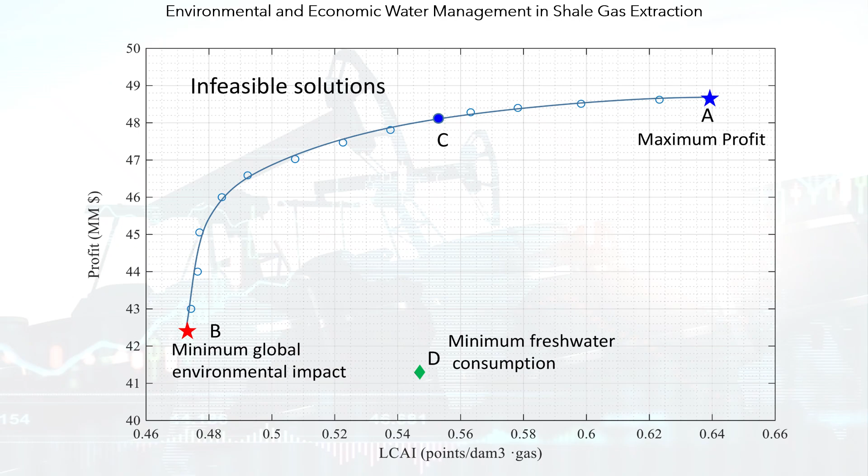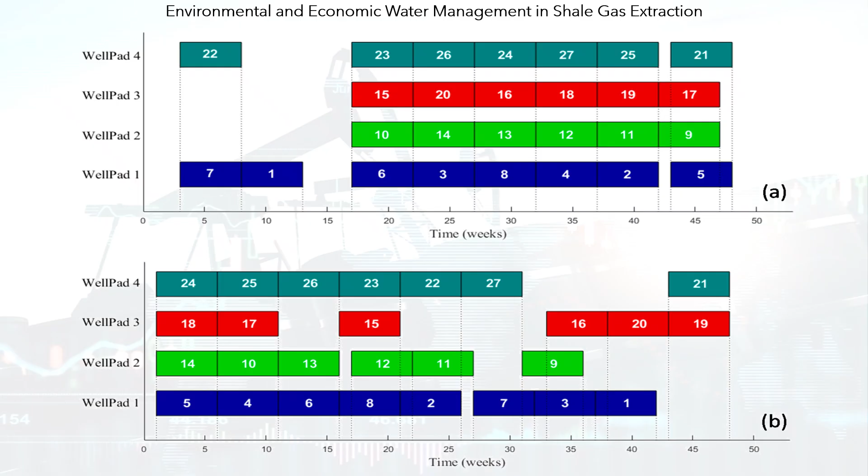The figure presents the Gantt chart for optimal fracking programs: A, Maximum profit, and B, Minimal environmental impact. The number in each rectangle identifies the individual wells on each well pad.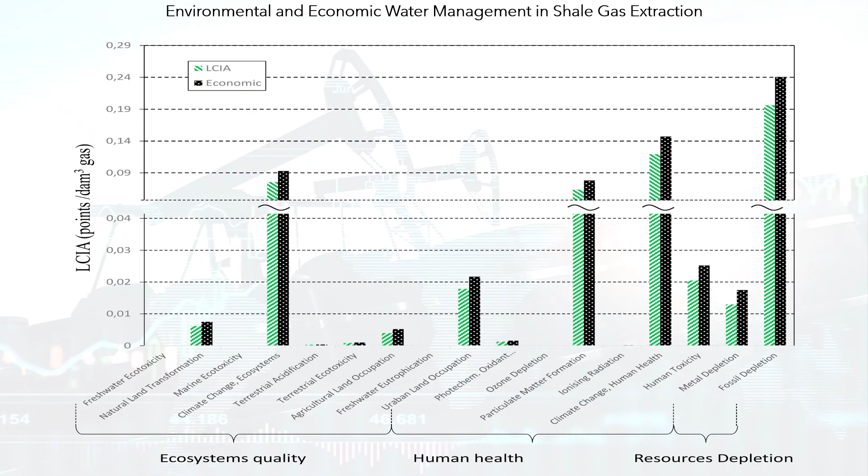The figure shows the comparison of the environmental impact subcategories, using ReCiPe endpoint H, A, for the optimal solution for the best economic and environmental solutions.

The table presents the well data for example 1. The 14 well pads, from A to N, are linked to the columns of the table.

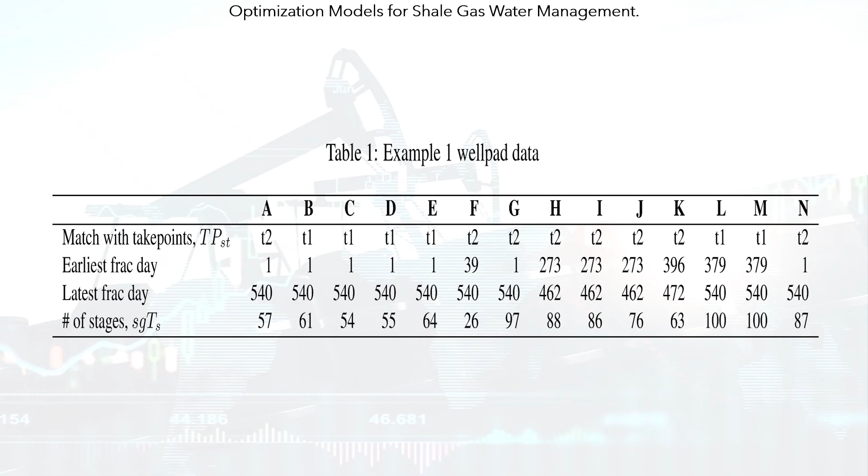Optimization of hydraulic fracturing wastewater management, using hybrid multi-objectives linear programming. Hydraulic fracturing, HF, generates large volumes of wastewater, with a high level of contaminants during unconventional oil and gas production.

Wastewater management supports sustainable economic development based on a hybrid multi-objective linear programming, HMOP, model. The goal is to simultaneously minimize the total cost of wastewater treatment, environmental impacts, and deviations from target constraints.

The main limitations are the maximum concentration of total dissolved solids, TDS, and its maximum concentration in the wastewater treated for reuse or discharge. On-site treatment, deep well injections, and off-site treatment are considered as HF wastewater management strategies.

The model identifies the optimal strategies in which the volume to be transported, and the volume to be returned for reuse is determined for wastewater. When the volume of wastewater is less than the on-site treatment capacity, the model recommends 2 strategies as optimal.

The volume equals the on-site treatment capacity: 3,000 barrels of HF wastewater is delivered to on-site treatment, and the remaining volume goes to off-site treatment. When there is no demand for water for the next fracking, the model selects deep well injection rather than treatment options.

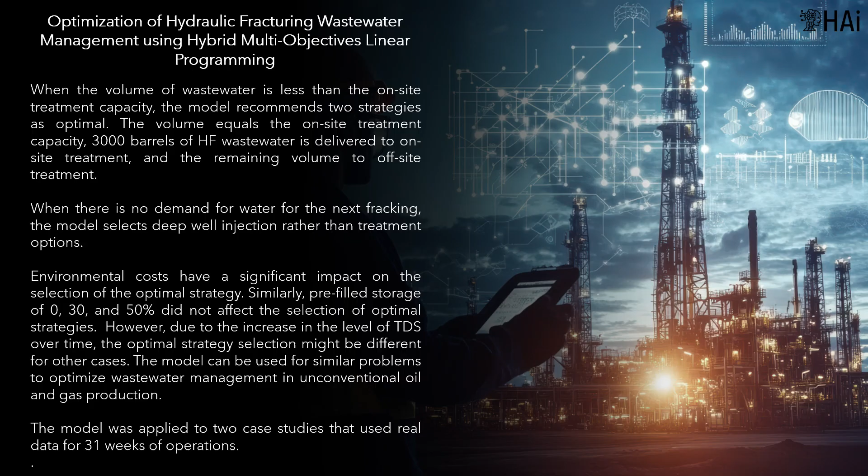In 2012, 25% of total Canadian shale gas was produced in British Columbia at an average production rate of 2 billion cubic feet per day. The Canadian Association of Petroleum Producers estimated that 22% of total shale gas production in North America will be produced from Horn River and Montney basins by 2022.

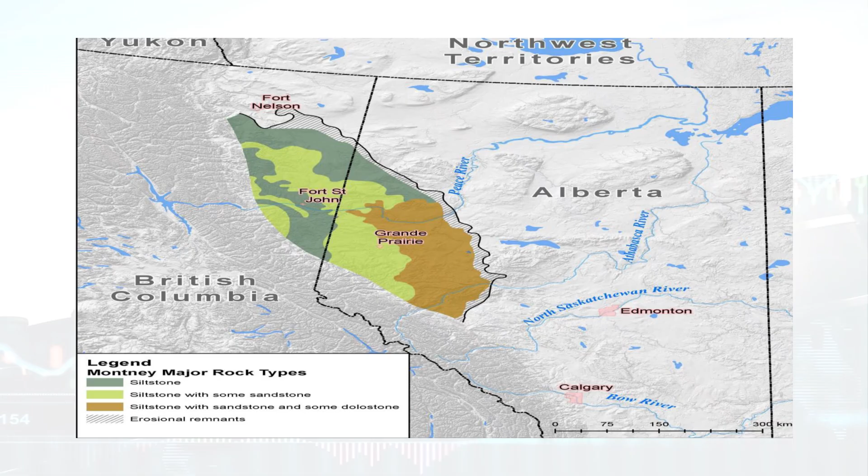Natural gas investment will significantly improve the Canadian economy from 2012 to 2035. The Conference Board of Canada predicts $386 billion Canadian dollars will be contributed to the natural gas sector by 2035, with British Columbia contributing $181 billion and Alberta $154 billion, leading in natural gas projects.

The overall objective of this study is to schedule HF wastewater to select an optimal management strategy in each period, which can be per day, week, or month. The figure shows the scheduling network to deliver HF wastewater from wells to storages, and then to wastewater management strategies.

The wastewater treated from on-site and off-site treatment strategies is returned to the network for temporary storage in tanks. The model can select the optimal strategy that is feasible according to the quality and quantity of HF wastewater during each period. In practice, for each well, the volume of HF wastewater and the total dissolved solids (TDS) level change over time. Therefore, the hybrid multi-objective linear programming (HMOP) model can select several optimal strategies during different periods.

In 2013, Adams described in 'Achieving Zero Discharge of Water in HF Activities' the concept of flowback water mixed with produced water to blend with fresh water, as shown in the figure. Therefore, the HF wastewater is conveyed through pressurized and membrane filters to remove TDS.

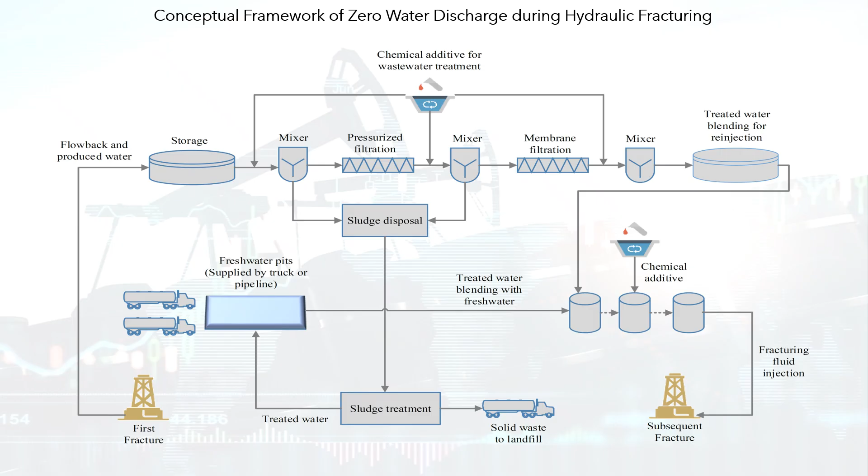After blending, chemical oxidation and electrocoagulation are used to achieve the desired water quality for reuse in subsequent fracturing. The concept minimizes off-site trucking and treatment, volume of waste disposal, and freshwater withdrawal in the next HF, which is a cost-effective strategy with less environmental impact.

The figure indicates the HF wastewater delivering network, which shows the sending of HF wastewater to a treatment plant for reuse in the next fracking or for deep well disposal. The network contains 2 phases.

Phase one: preparation of the hydraulic fracturing wastewater management operation network. HF wastewater is sent to the treatment facilities, and it returns to be re-injected for the next fracking. Phase two: wastewater management strategies. It starts when treated wastewater is reused, and again the HF wastewater is transferred to the management strategies.

In the first phase, the network involves a set of general components represented by indexes: wells (I), on-site HF wastewater storages (J), HF wastewater treatment strategies (K), water tank (S), and freshwater (F).

In the second phase, wells (H) and on-site HF wastewater storages (G). The HF wastewater is managed through 3 main strategies: Strategy 1 is on-site treatment facility, Strategy 2 is deep well injection, and Strategy 3 is off-site treatment plant. Freshwater is blended with treated wastewater and chemical additives to reuse for the next fracturing.

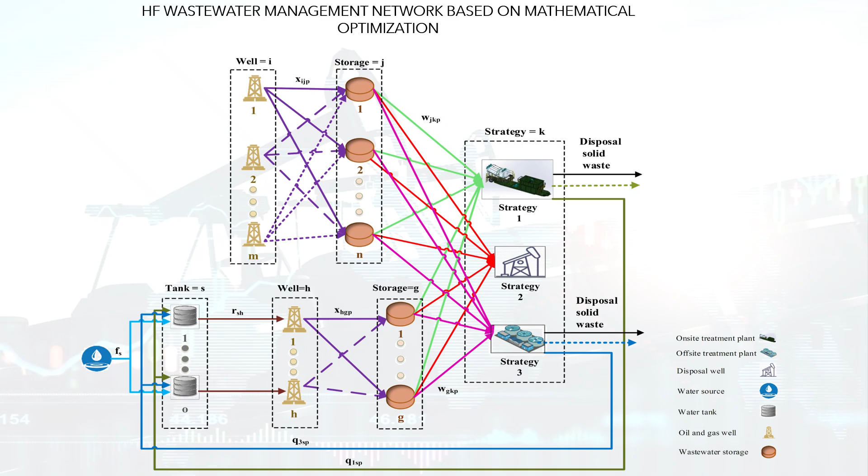Cooperation between oil supply chains: a game theory approach. Cooperation between oil supply chains powered by artificial intelligence is transforming the industry by creating digital supply networks, DSNs, that are more flexible, resilient, and transparent. This integration allows data to flow seamlessly between suppliers, refineries, pipelines, and markets, facilitating intelligent, coordinated decision-making in real time.

Lloyd Stowell Shapley was born on June 2, 1923, in Cambridge, Massachusetts, one of the sons of Martha Betts and the distinguished astronomer Harlow Shapley, both from Missouri. Shapley attended Phillips Exeter Academy and was a student at Harvard when he was drafted in 1943. Shapley served in the United States Army Air Corps in Chengdu, China, and received the Bronze Star decoration for breaking the Soviet weather code. Shapley was an expert chess player and an avid baseball fan.

In game theory, Shapley value, named after Lloyd Shapley who introduced it in 1953, is a solution concept in a cooperative game. For each cooperative game, Shapley value allocates a single share among players of the total profits generated by the coalition of all players. The Shapley value is characterized by a collection of desirable properties or axioms.

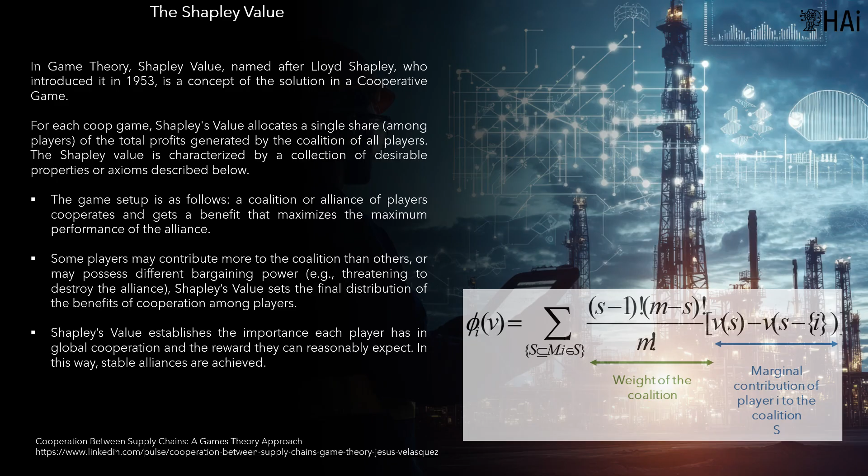The game setup is as follows: a coalition or alliance of players cooperates and gets a benefit that maximizes the performance of the alliance. Some players may contribute more to the coalition than others, or may possess different bargaining power, such as threatening to destroy the alliance. Shapley's value sets the final distribution of the benefits of cooperation among players, establishing the importance each player has in global cooperation and the reward they can reasonably expect. In this way, stable alliances are achieved.

The Marcellus Shale play is dominated by a group of super-independents that have consolidated the region's core acreage to drive operational efficiency through scale. The figure shows wells from 12 companies operating on the Marcellus Shale play. According to the style of subsoil ownership in the United States, the ownership of wells is associated with the owner of the land, and projects must be carried out communally when many land operators must operate together. Given the costs of operation, doing so individually can kill the profitability of projects.

The first decision that companies must face is whether to act individually or cooperatively. In the case of cooperative action, Shapley's theory is a way of dividing activities and the distribution of profits, in order to achieve stable coalitions.

Variations of Shapley value: because their exact calculation can be computationally expensive, various variations and adaptations have emerged for different fields. There are versions that modify how players are grouped or how they interact with each other. Owen's value is used when players form groups or priority coalitions before negotiating. It is useful in political or business situations where power blocks already exist.

Shapley causal value adjusts the calculation by considering the cause-effect relationships between the variables. It is used to avoid attributing importance to factors that are only correlated but do not cause the result. Banzhaf value, like Shapley's, does not consider the player's entry order, but simply whether their presence changes the outcome of the coalition - voting power.

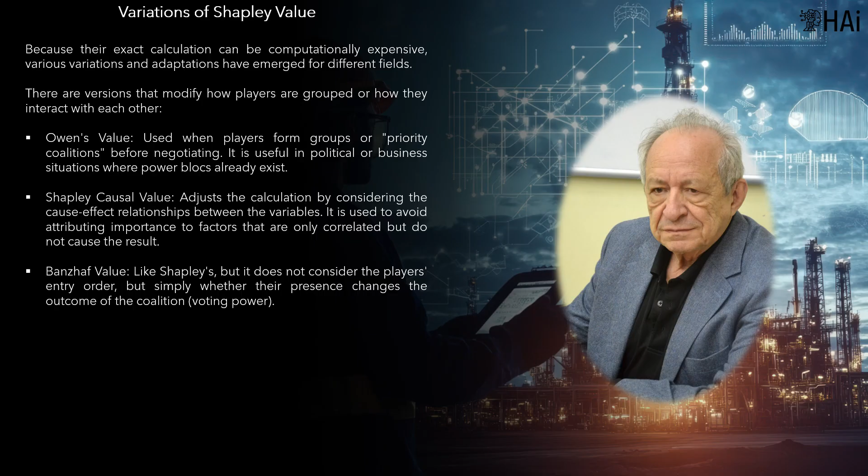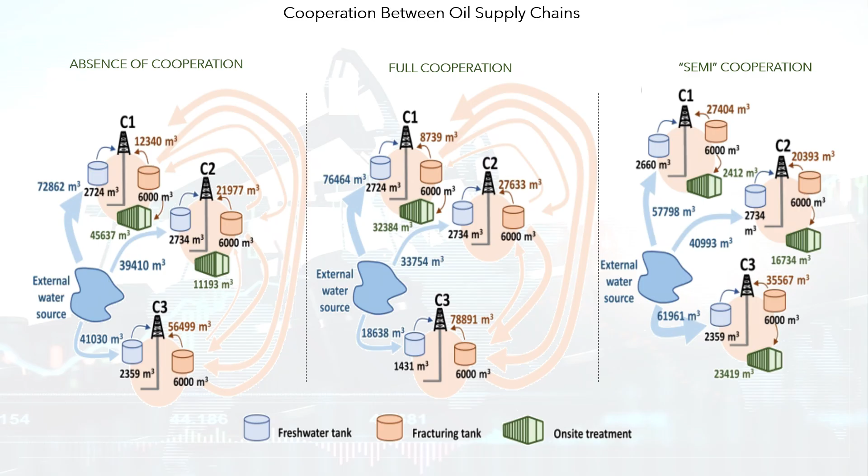In this case, three strategies can be considered for the solution of the problem: A, absence of cooperation; B, full cooperation; and C, semi cooperation. Three companies, C1, C2, and C3, must choose how to act to define a fracturing schedule for shale water management strategies. The figure shows the Pareto curve for the cooperation between oil supply chains.

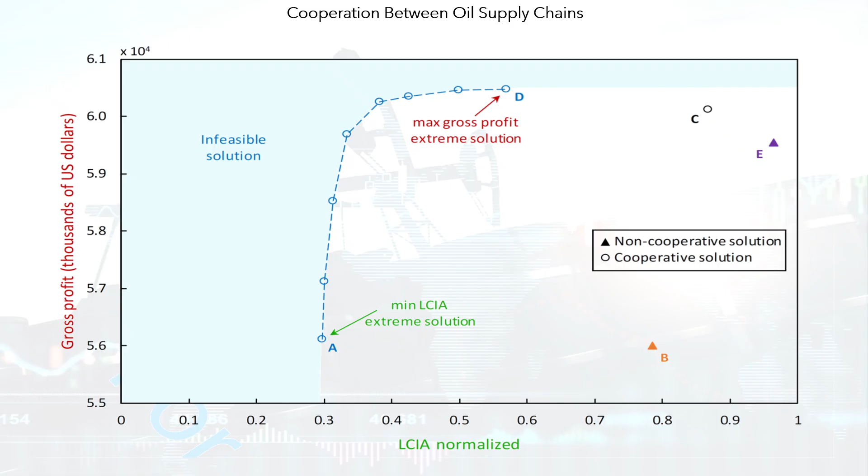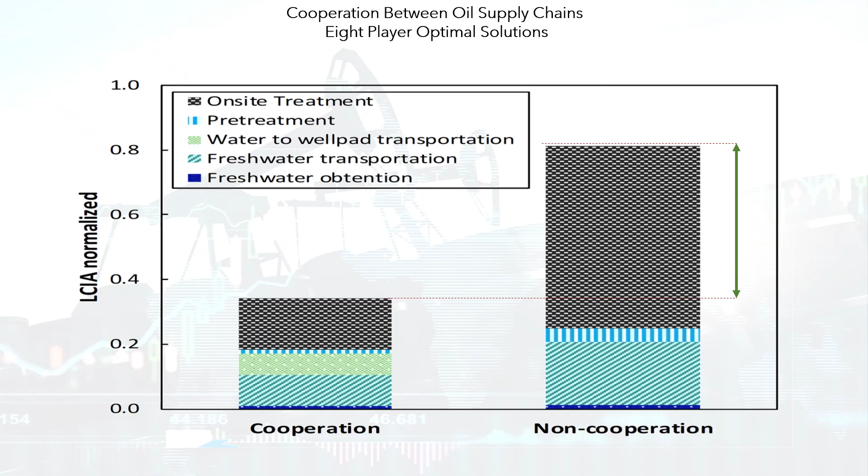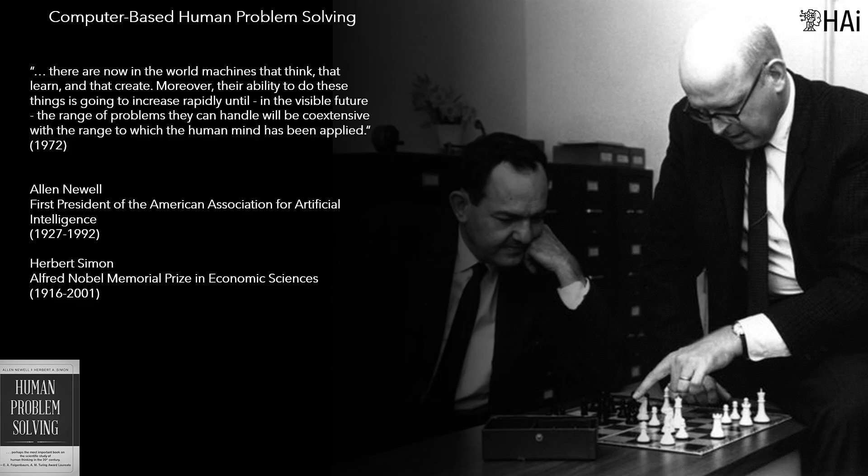There are now in the world machines that think, that learn, and that create. Moreover, their ability to do these things is going to increase rapidly until, in the visible future, the range of problems they can handle will be coextensive with the range to which the human mind has been applied. From the book Human Problem Solving, written by Allen Newell and Herbert Simon.